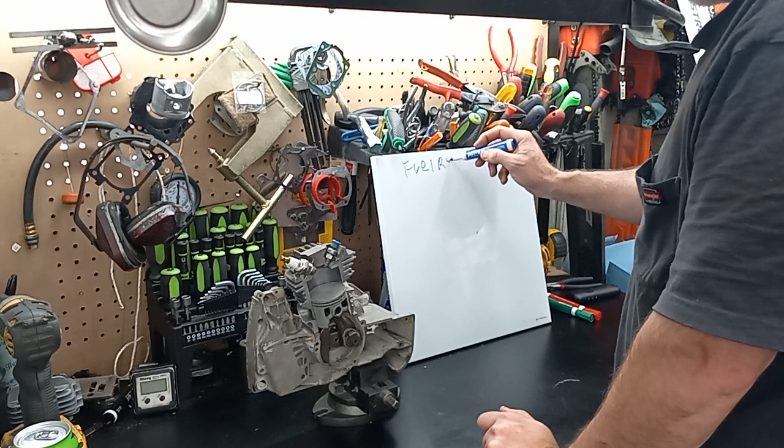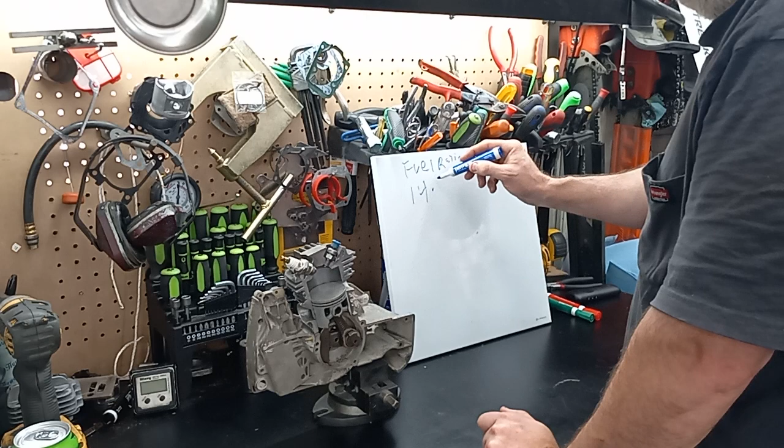You have your fuel ratio. Flies flying around me. You got your fuel ratio. In a perfect world, that would be 14.7, and that would be in a perfect world.

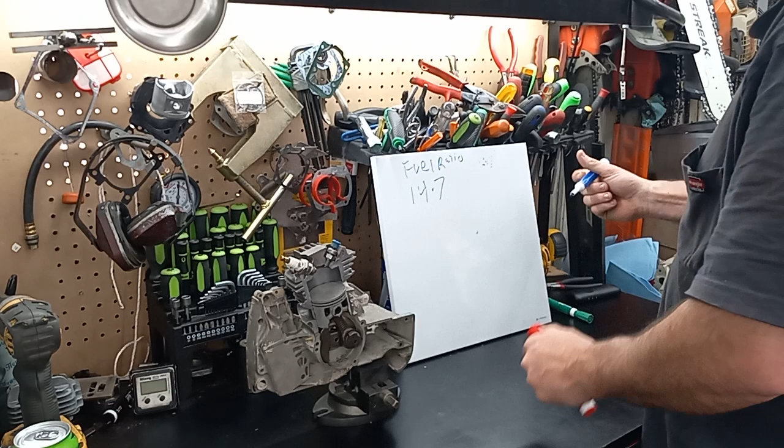And what that means is your fuel - let's do a different marker here. Let's say your fuel, this would be the fuel. And in a perfect world, it would be mixed with air to this 14.7, and when that combusts, that would leave no unspent fuel or air in a perfect world. Well, 99% of the time, you never achieve that - an engine is just not efficient enough to achieve that. You want to try to shoot for that, but it just doesn't happen.

So that's your fuel to air ratio. And like I said, when that ignites, once that's all combusted, there's no air left in there, but there's no unspent fuel either. And that works out to, I believe it is, 1 gram of fuel to 14.7 grams of air is what that is. So once you understand that, we can move on to the next thing.

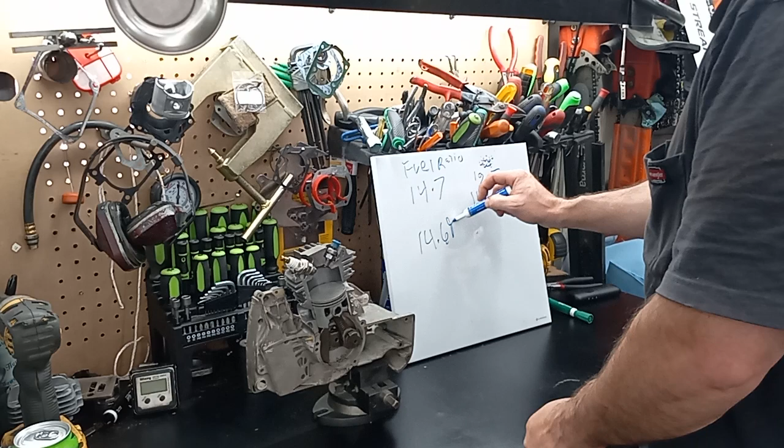We're surrounded by pressure, atmospheric pressure, and I believe, off the top of my head, I believe it's 14.697 is our atmospheric pressure. That is how much pressure is around us, the engine, everything. Because I've seen some videos where people are talking about...

I've seen some videos where people are talking about how this isn't an air pump. This is an air pump. No matter which way you look at it, this is an air displacement pump. You're taking air from one side and displacing it to another side.

When this starts to go up, you are changing this pressure. This is the standard pressure. If you lower it, say this comes up and this turns into like 10 or something, you are lowering this pressure, which is creating a vacuum. So when this cracks, your air charge is rushing in to fill this void. It's negative.

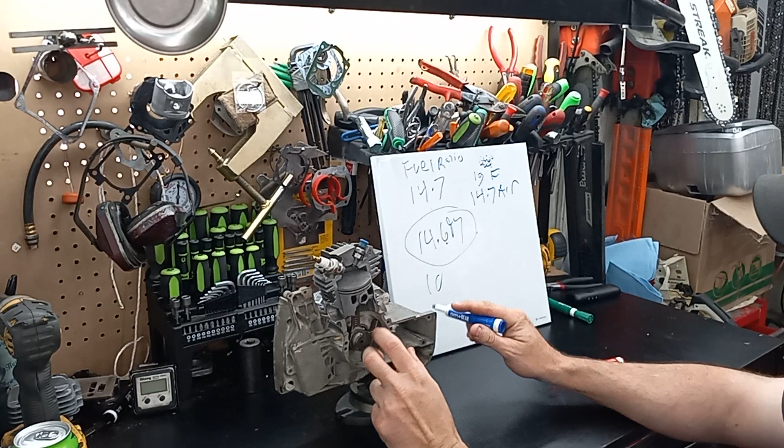It's got to fill it back to the 14.697. If it fills anything above that, you are essentially boosting it. Well, as far as I know, they ain't come up with a boosted chainsaw that's for sale yet.

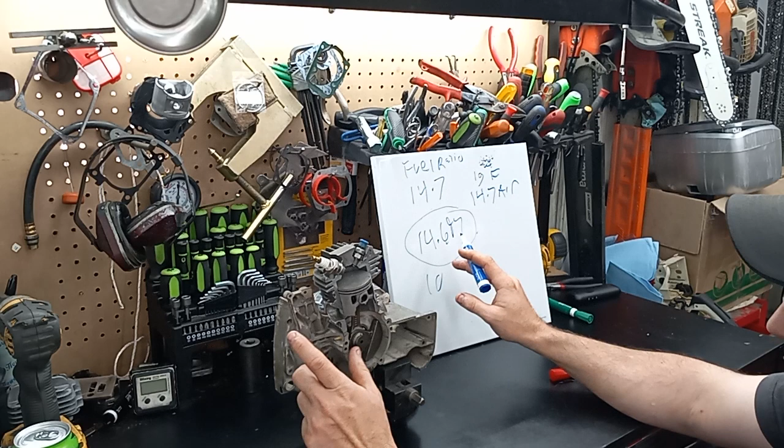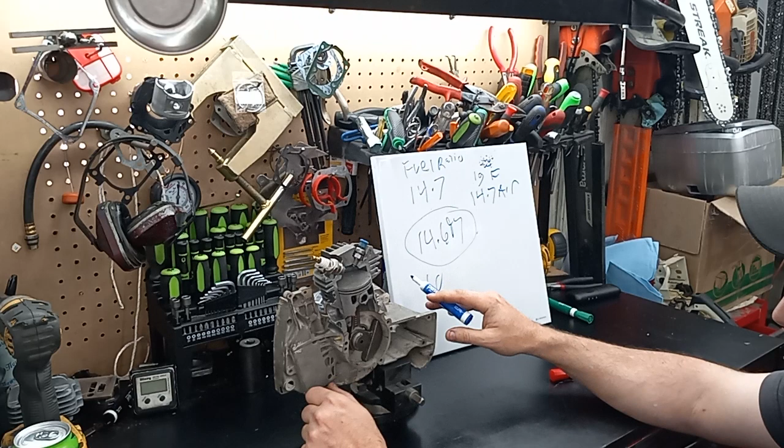But there was another guy saying that air is pushed through. That's not the case. This is just the standard. A carburetor, if you're pushing air through a carburetor, then you're using forced induction, like a blower or a turbo, and you're pushing air through it.

This is pulling air through it, but it will only pull at its maximum once the inside of here reaches this. It's done pulling on a chainsaw. It will not pull any more than that.

So as that comes up, it's already compressing your charge from the previous cycle or whatever. But let's just say it was here and we go to start the saw or whatever. It's creating a negative pressure as you're pulling it over. She cracks open. Your fuel air charge is rushing in.

Comes around. Now, once that port right there shuts off, now this is a compressor part at this stage. Every increment that this comes down, you are now increasing above this. So now this is becoming pressurized, and it's going to keep pressurizing it right up till your transfers crack.

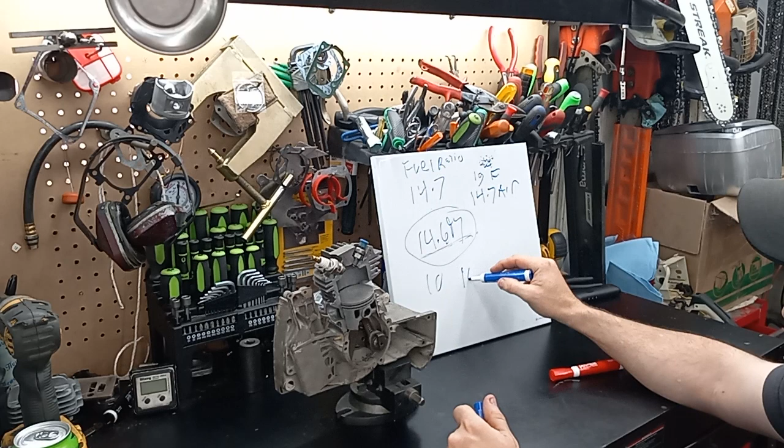And because, let's say you've compressed this, just oddball, to fit to 15 or 16, now this is going to try to escape. It's going to go up the transfers and try to fill this void, because now, well, this thing ain't rolling too good.

I got dirt in the bearing. But it's going to try to fill this void to this pressure right here. And once that hits bottom dead center, it's pretty much done its thing.

And then it's going to come around, and once that shuts off there, this is starting the negative pressure side again, and you're compressing this side. Well, once you pass that exhaust port right there, now you're compressing from here to here, and that's got your air charge, and if all is good, you're as close to this 14.7 as you can get.

And then as it comes up, it compresses it, and fuel burns at a given rate. It does not change. Only, you can change fuels, and each fuel has a different burn rate. That's why there's ignition timing.

Now, if you were to have this spark exactly at top dead center, as that charge is ignited in there, it's expanding in all directions. So here's the cylinder wall and the piston, and here's your combustion chamber. It's expanding in all directions because it burns at a given rate.

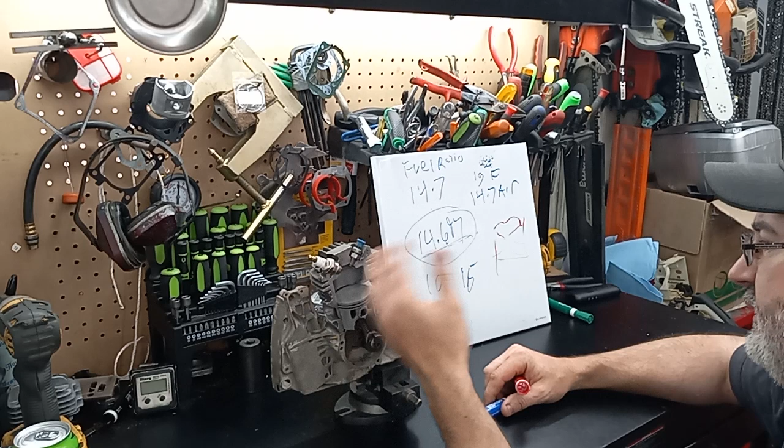Now, if your exhaust is really restrictive, when this charge comes in, it's going to hold more pressure here than what's in the case from compression. What happens is when the transfers crack open, if you have too much exhaust gas pressure there, it's actually going to force some of that already spent charge back. That's your spent gases, you've already extracted what you could get out of it. So any spent gas that goes down your transfers and into your crankcase, which I call reversion, is now taking up space you have to evacuate, and you're not getting fresh charge in there.

Now, one way to cure reversion is longer blowdown. Longer blowdown is where the ports start to open sooner. If your exhaust is really free flowing, you can typically get away with a shorter blowdown.

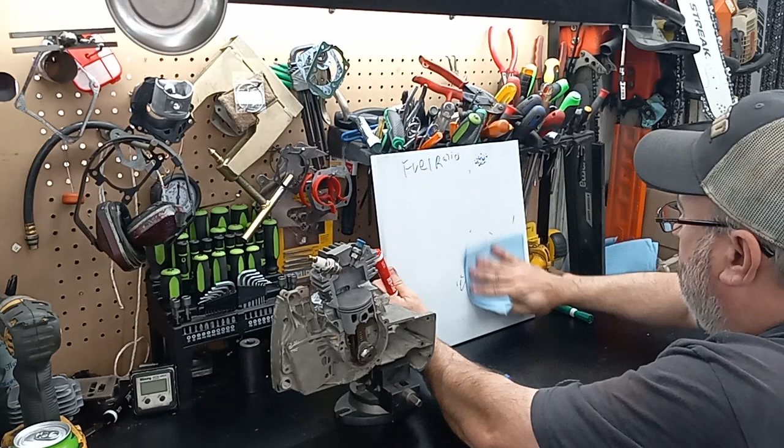If your transfers are compromised, like this is kind of an outdated cylinder here, like on a quad loop... On a closed quad loop, let's say here's your cylinder wall, there's the chamber, and you've got your intake and your exhaust.

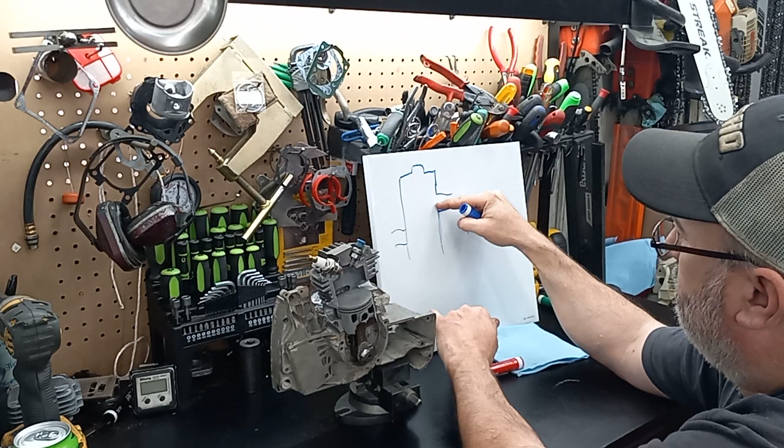Your transfers would be like right here and right here. They're kind of messed up there. Some quad loops have a big lower area down here where it's got the loops that come up and feed them.

What I call front fed, like on the newer stratified saws, they have a tunnel, and most of them are up front here. It comes up, and that tunnel — let's say here's the bottom of your cylinder on a front fed — you've got your quads up inside the cylinder. You have one little tiny square on each side feeding two transfers.

I call that compromised, because you're going to get a high velocity out of that, but you're not going to get a huge flow. So on these builds I run a shorter blowdown because I need the longer transfer duration — transfer duration being how long the transfers are opened. I need a longer transfer duration in a compromised front fed transfer setup to adequately fill the cylinder. On the plus side, a smaller transfer has a higher velocity and is more restrictive, so it's less likely to get reversion down it, if that makes sense.

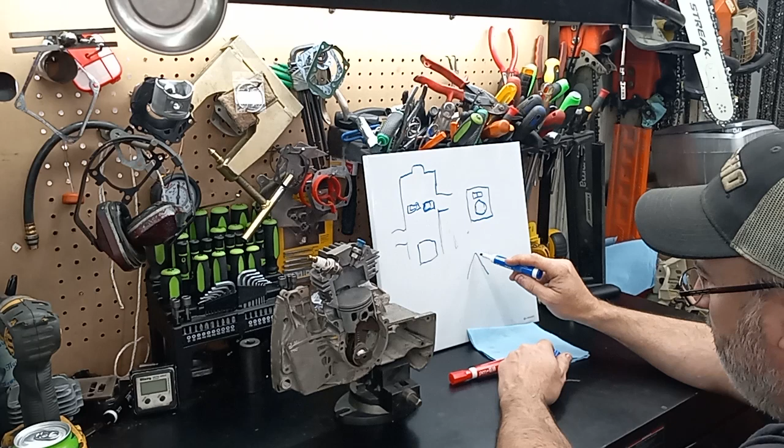On the older style saws, when I'd run short blowdown in them and have dyno runs pulled, the saw would be real peaky on the graph. On saws where I gave them 5 to 7 degrees more, on this style I typically run a bare minimum of 20.

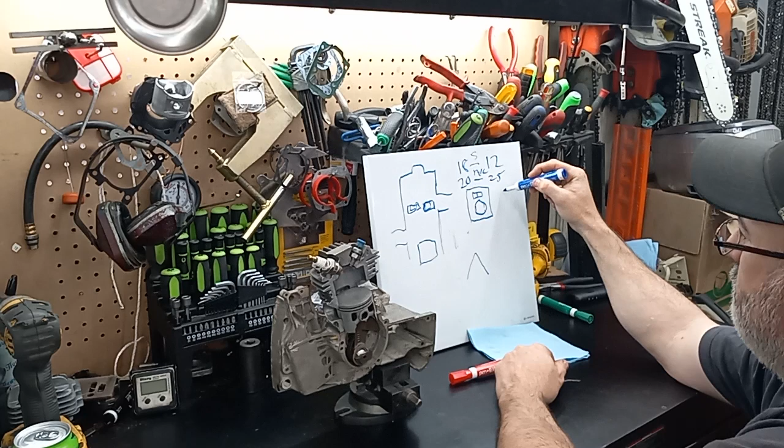Now let's talk about what short blowdown is. To me, short blowdown is 15 down to 12 or less. I know a couple guys that like to run 10 — that's short. Medium to long is 20 to 25. Long is 25 to 30 plus.

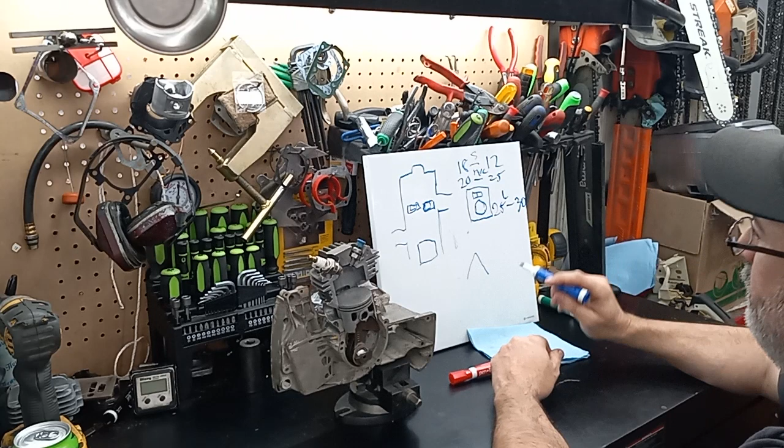And I've got some out there running 33. I've got a 4910 out there running 33 degrees of blowdown, and it's pretty peppy. It made 5.72 horse.

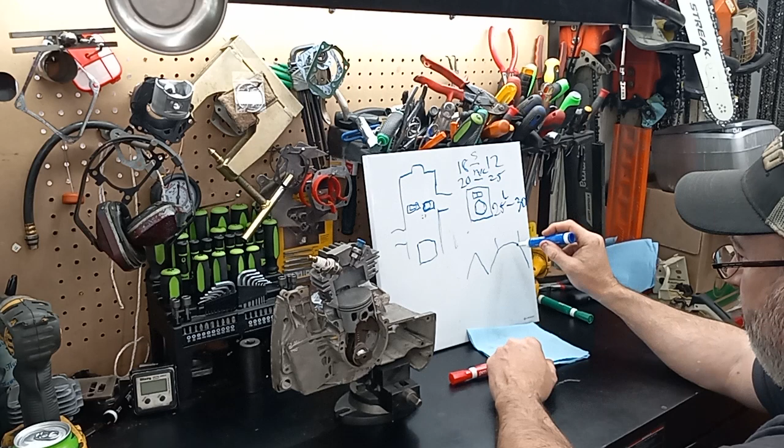But on this style transfer setup, when I have them pulled with medium to long blowdown, the graph looks more like this — I have a much broader usable power band where it carries the power for longer, and a lot of times that's my particular fun saw. Like if I'm production falling, cutting up trees, especially if I'm felling a tree, this gives you a long, broad power band, and your saw's not stalling out in the cuts.

Typically, when you build one like this, a lot of times though, if you're cutting cookies or something and you keep it at this little peak area, yeah, that thing flies like the dickens.

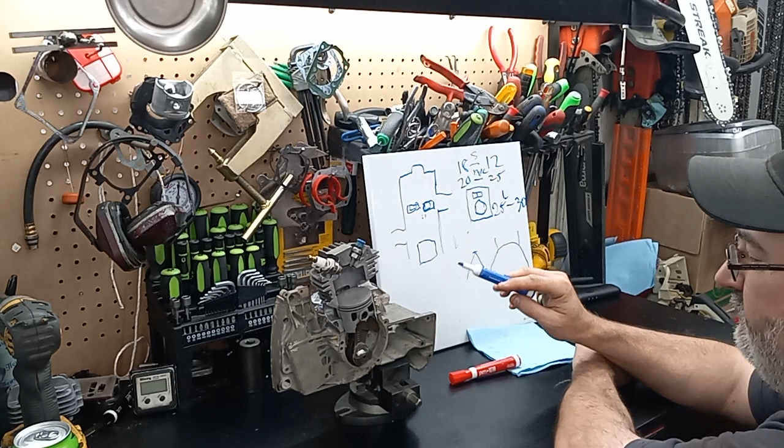But then you go out and put it in a real world situation, and as soon as your felling dogs touch and the saw comes up on a big solid piece of wood, it stalls out in the cut, and that drives me absolutely bonkers.

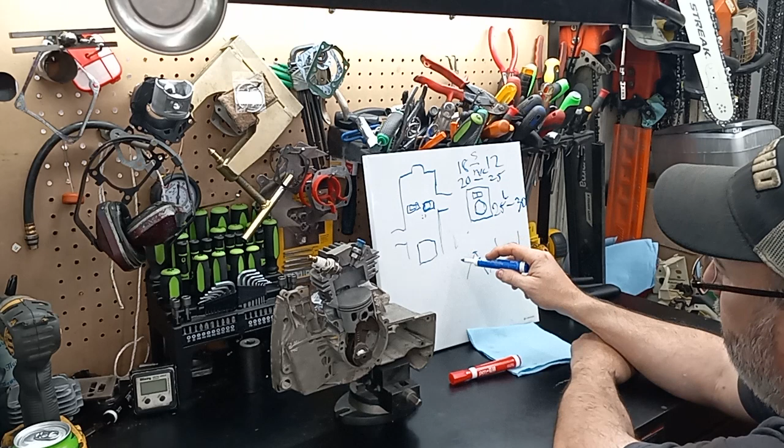Now the stratified and the front fed saws, they seem to carry the short blowdown considerably longer, and I think it has to do with the torque you're getting from the higher velocity of the transfer design.

That's another thing too. There's different ways to build. This is gonna be a long drug out video, guys, and I'm doing a horrible job at butchering this stuff. On the quad loops...

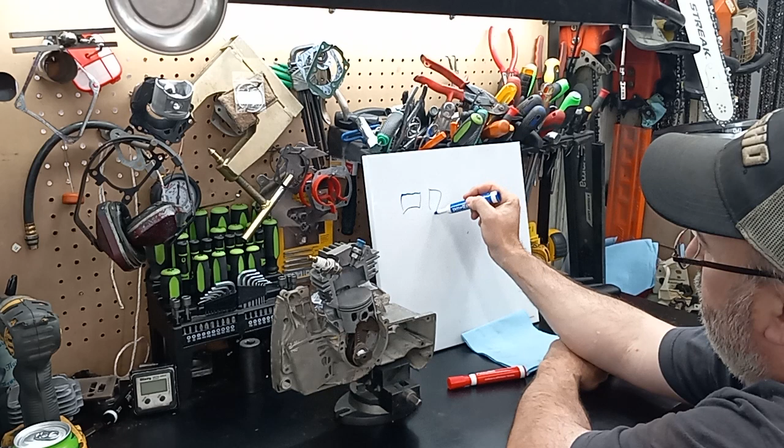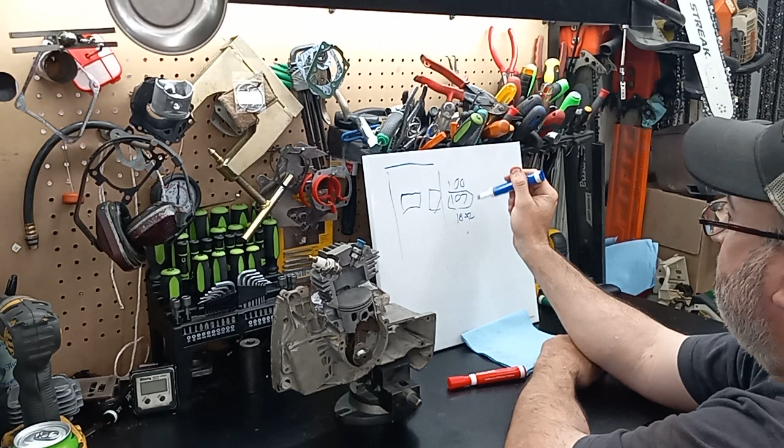On the quad loop ones, a lot of builders favor cutting the chamber and raising the roof or lowering the roof after they do all the base work. Say stock it was at 100. They'll do all their machine work and stuff, and they'll move it to 107, and they'll run that exhaust number right there with 18 to 20 degrees of blowdown. I know there's probably a few builders out there that's going to get mad that I'm giving this information out, but whatever.

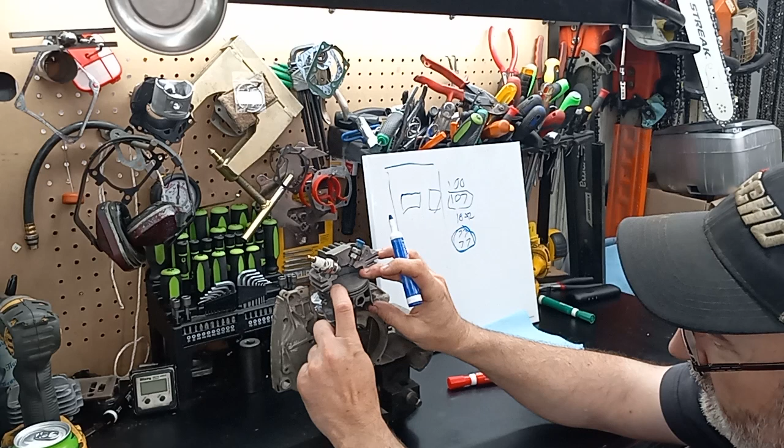So say they took it from 100 to 107, they gave it 18 to 20 degrees. Sometimes they'll split them, and then they'll run between 73 to 77 on the intake. The reason they're running a lower intake is so they've got a lower intake number versus a higher one, because they have a longer compression time to build the pressure up, since they've compromised their pressure with the short blowdown.

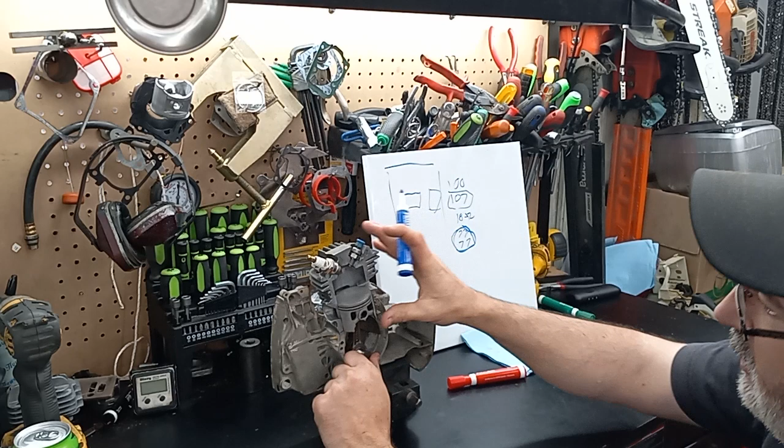How they're getting their torque is the longer, or the lower exhaust roof, has a longer time to build power in the cylinder, and they're getting their RPM that way. A lot of builders build that way.

I don't typically build that way. I've tried it out, and you can get good gains that way. But on this style, I would much rather do 100 on the roof, still cut my chamber and stuff, get my duration up there, and have 20 to 25 blowdown with between 80 and 84 on the intake. That's my particular style.

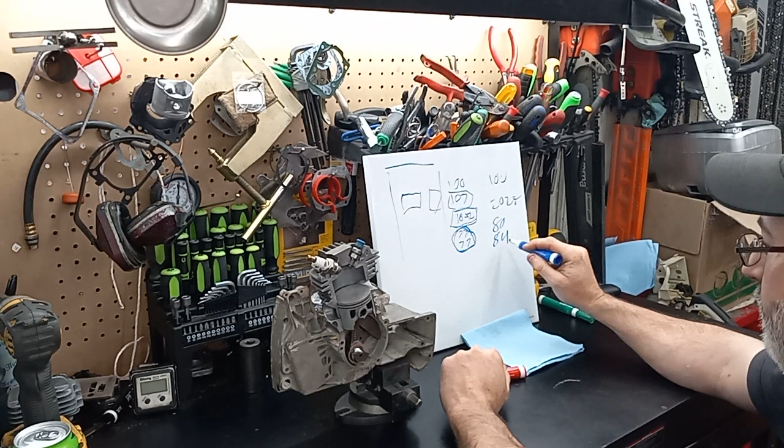There's some that say having the long duration on the intake sacrifices your throttle response and makes them pigs and sluggish and all that. I haven't found that, though certain saws, if you over-intake them, yes, it can happen. But your port shapes play a lot into it too. We'll get into that probably in a different video, or maybe we'll discuss it a little bit here.

On a front fed saw, I would probably do 100, and I'd probably do like 118 to 115, and especially if this is a straddle saw, I'd be anywhere between 85 and 90 for my intake. If that was a straddle or front fed, I would also cut the chamber, do the base work, all that good stuff.

So this just gives you guys some different ideas. You can take your exhaust ports - let's say if one exhaust port's like this, and this is the top of the roof, I hate that style exhaust. Another one that's pretty common, they'll shape it like this. I kind of butchered that a little bit, but it'll have a wider spot on each side.

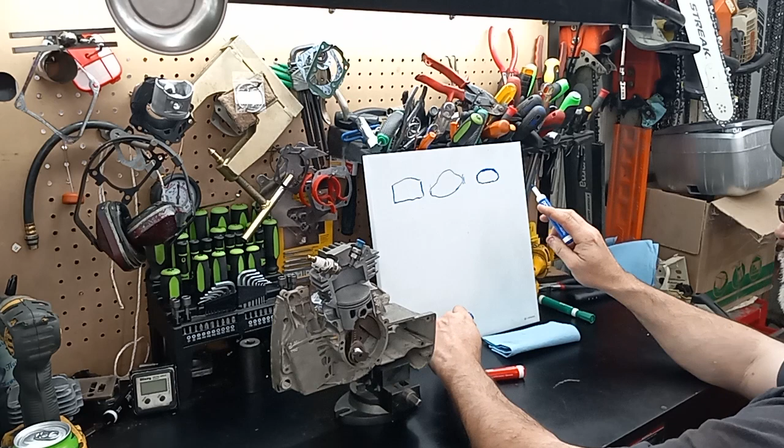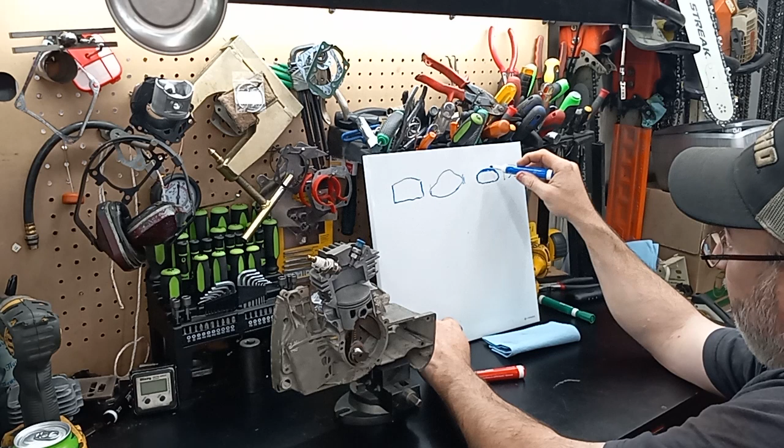Depending on, say if this is at 102, I can manipulate by how flat I go on the top of this, with still a slight arch, because you can't go completely flat. By changing the ray of light when it comes through there, I can manipulate it - I can make that 102 behave like 96 or 98 on the roof, just by manipulating my exhaust port.

Another thing to consider - sometimes going wider, and I found this out on the 500i's too, by going wider you're killing your velocity. Sometimes just 30-40 thousandths on each side is more than enough. It keeps your velocity up, because if your exhaust is coming out of there at a very rapid pace, it can also help pull the charge out of the crankcase and give you a good boost in power.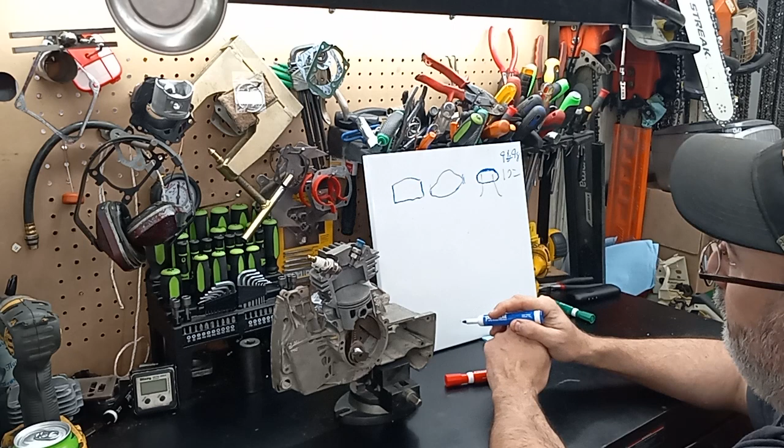I see a lot of shapes like this factory, and I hate that. I would come in there and reshape it, and when I widen it, I'd give it some rounded edges. If at bottom dead center this is above your piston, then I would lower it to the height of your piston. If your piston is already above it, then I never touch the floor. So that's just something else to consider too.

Now another big topic is compression, guys.

Holy cow, I learned this a long time ago. A good example is gunpowder. If you take gunpowder and just put it in a pile out in the open and light it on fire, it just fizzles. If you take that same amount of gunpowder and put it in a compressed space, you get a huge bang. Same thing with an air fuel charge.

If you've got, say, 120 pounds of compression, when that ignites, it's only going to apply a certain amount of force down. You take that same saw, cut your chamber, do a pop-up, or however you want to do it, sometimes a little of both, and bump that thing up to 180 to 200 pounds. I've got some as much as 235. Anything I've ever pushed past 235 has given me issues.

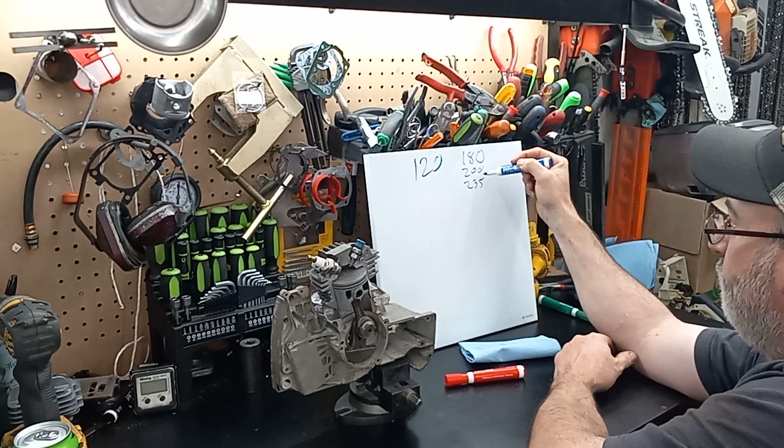Anything over 235, I'd recommend some better fuel. All this stuff I'm showing you guys, I run 87 octane on my stuff. It's a more reactive fuel. As long as it's not pre-detonating when it's coming up to top dead center, I run 87. If it starts to pre-detonate, then I have to switch my game plan up. But if you increase your compression, you get a bigger bang and it applies more power down on your stroke. So that's my theory on that.

Let's talk about combustion chambers. You guys hear me talk about combustion chambers quite a bit. Yeah, butchered that drawing, didn't I guys? Never said I was an artist. Now this is pretty common. There's some other ones where this side's a little smaller, D-shaped, and so on and so forth.

Cutting a band, that's where you come in here and either use something like Dino Joe's cutter, or put it in an apparatus in my lathe, and I come in with a boring tool, and as it's twirling around I cut between 30 and 50 out of the band. Typically I don't go much more than 55, because you start running into what we call the ring of death.

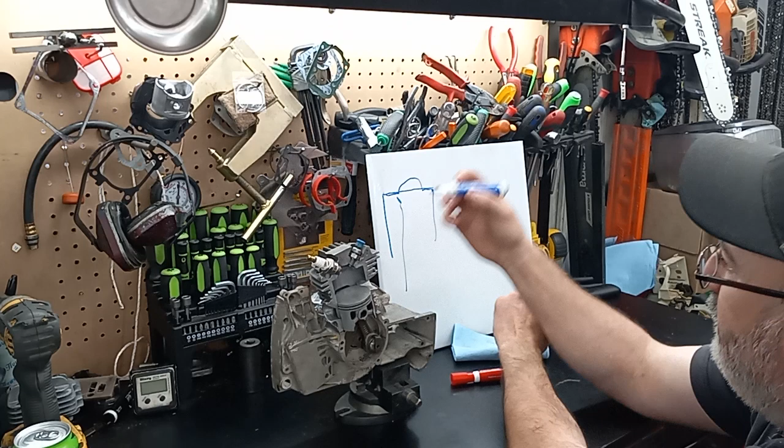And if you're cutting off on your piston, let's say if I'm going to do a pop-up, I might cut 30 off the piston and only cut 20 out of the band. The reason I did that is because I changed where this piston ring locates, and I can't chance that ring running past the plating.

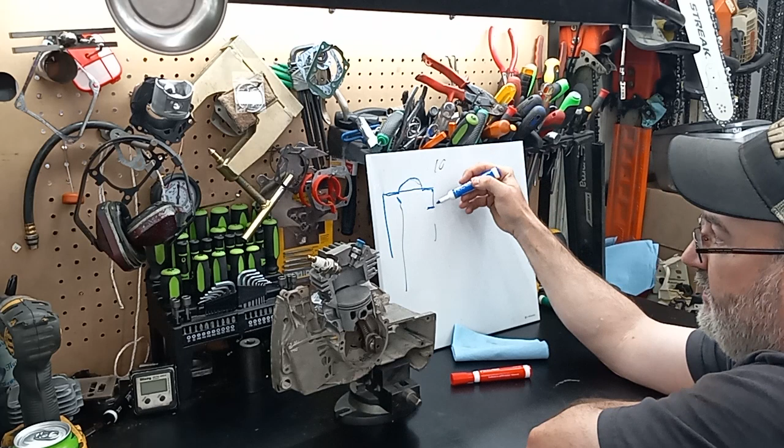When you cut those chambers on just a flat band cut, you just shrunk your combustion chamber area. And very, very important, if you're raising your exhaust roof at all, it's almost imperative, because every 10 thousandths you raise that roof, you're killing roughly 10 pounds of static compression. So you have to shrink your chamber to get your compression back.

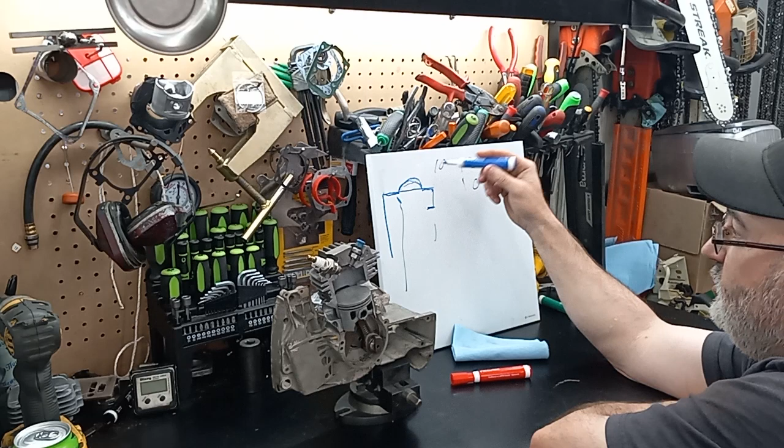If you raise your exhaust roof and don't shrink your chamber, you just took a saw that, let's say, was 120 pounds, and if you raised your exhaust roof 2 degrees, which is roughly 20 thousandths, you now have a saw at 100 pounds of compression. You gained some RPM, but you just killed a crap load of torque off that saw.

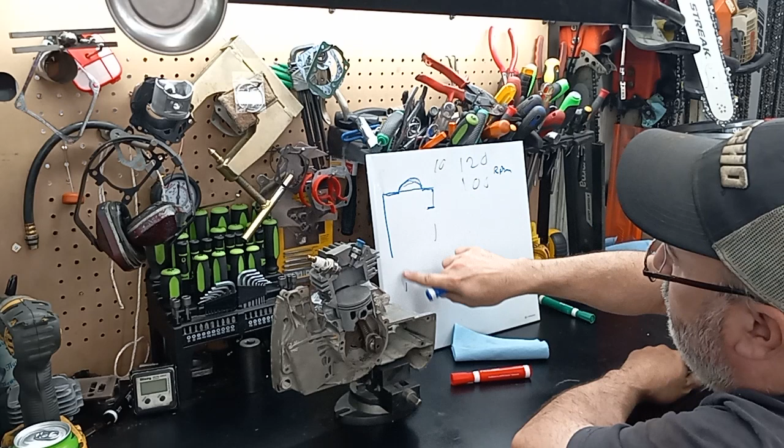Now, when you hear me talk about pop-ups, sometimes you can buy a pop-up. What the pop-up does is, here's your piston, and it's got a pop-up that stuffs up inside that combustion chamber. It gives you a little bit of a boost. Typically, like on a clamshell where you can't do the machine work, if they offer a pop-up, I wish they offered pop-ups for every clamshell out there, because it does give you a little boost in power. I either have to weld in a chamber on a clamshell to boost the compression, or I can stuff a pop-up in it. But typically, if you're raising your roof and you can add a pop-up, you can get a little bit of your torque back that way.

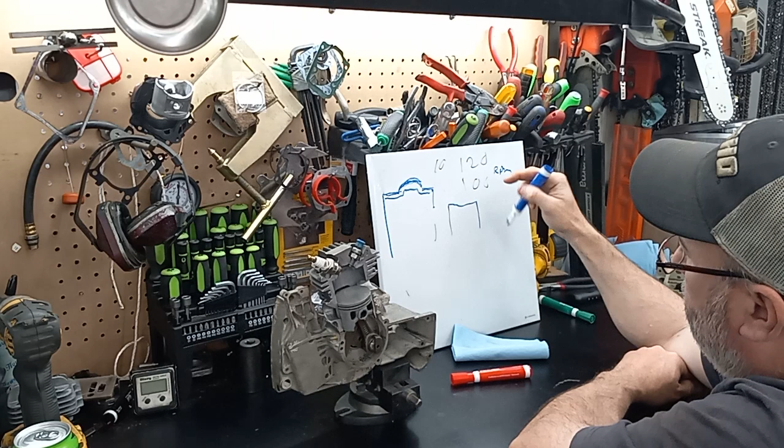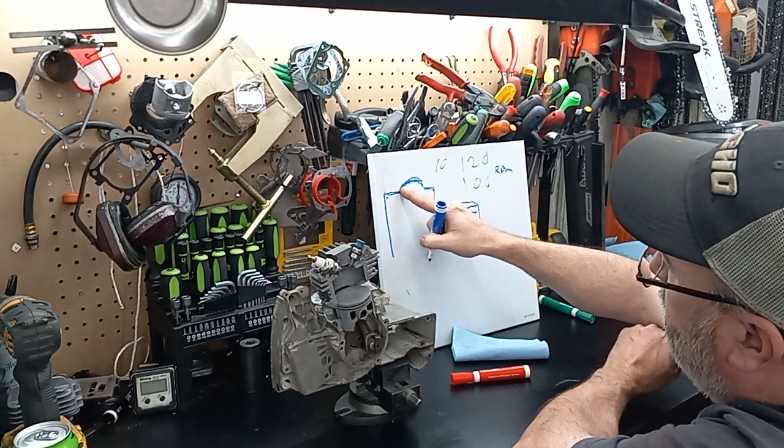Another thing you guys hear me talking about is button taper tops. That's where I take a piston—oh, I butchered that drawing too, guys—I take a piston, and you've got your rings. I have to be careful how much I cut off, but I come in on an angle and cut the edges of the piston off, so now my piston looks like that. Then when I cut that chamber, you hear me talk about how I match the chamber to my button top. Sometimes I just do a nice gentle angle.